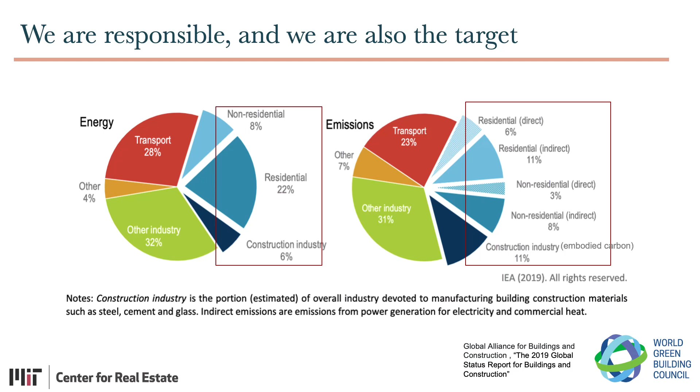Okay, when we look at this pie, they say, if I want my city to become net zero in 2040, we must target the building sector. So that's why all the real estate stakeholders are under big pressure to decarbonize. This is not just a US story, it's a global story. There are headlines in the media: the European Green Deal, a renovation wave, where they will invest a lot to renovate and decarbonize buildings. Mumbai, Asia, Mexico City, and in the US we have the Inflation Reduction Act, which injects a lot of capital into this sector to decarbonize it. So that's basically what's going on for decarbonization.

To decarbonize the building sector, we first need to understand what carbon is about for the building sector. We showed the building's carbon footprint, right? In general, two major categories. One is embodied carbon, in the concrete, in the cement, and in the production supply chain where you gather all the materials and then build. That's embodied carbon. The other category is operational carbon. The building is already there, a very durable asset, 50 years, 100 years, and each year you operate it, you have operational carbon.

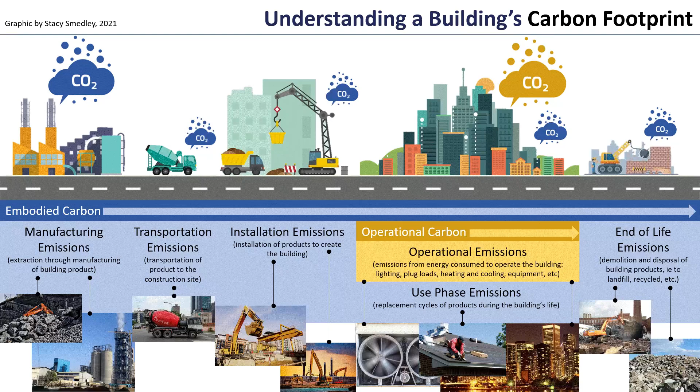So that's the idea. Now when they talk about decarbonization, many of those policies first look at operational carbon. They have not got the chance to look at embodied carbon, though now some of them try to look into this. But first, when they say decarbonize the buildings, they are talking about operational carbon. So that's basically the energy: the gas, the oil, and electricity you use in the building.

So now we also make our life easier. Let's put this embodied carbon aside, and we only think about the operational carbon. For operational carbon, there are several strategies that can help to decarbonize the buildings. Do you have any idea of these strategies of decarbonization? Look at operational carbon. Any thoughts, please?

Electrify the building? Electrify the building. Yeah, that's good. That's one of the major topics we are going to talk about. But first, think about the high level. What are the ways that we can decarbonize the building? Weatherization, is that it? Yes, that helps the building to have better insulation, for example, right? For the cold weather, yes.

Perhaps also using passive strategies. Passive strategies. What kind of passive strategies? Give an example. It's like a wind effect where you have like a wind, perhaps. Ventilation, yeah. Like this natural ventilation. You don't use a machine, but you use the natural wind, right? Okay, Wilson. Maybe use less gas or electricity. Yes, okay, good. So that's the first thing I want to talk about.

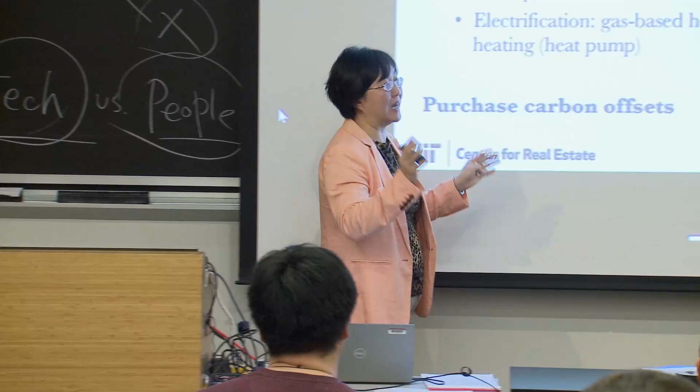And then another thing is you purchase a lot of energy from the city level grid, right? The electricity. So then you need to change from the fossil fuel, gas, into electricity for the major types of energy consumption, especially winter heating, from gas to electricity. And then if the city is also doing a good job, the city will decarbonize the city grids. If the city's electricity is from solar or renewable energy, then you switch to fully electrified, and you are decarbonizing your buildings.

If you only change to electricity, but the city's grid is still dirty and they use coal to generate electricity, then it still won't work. So that's a collaboration between a city and a building. I remember reading an article about that, and they said that even if the cities are not decarbonizing their grid, it's more efficient to use electricity, because the transportation footprint of coal and oil is a lot higher than that of electricity. It's very efficient to transport electricity.

Yeah, that makes sense. Because the city is big, the scale, economies of scale, right? They generate the electricity and then you get the electricity from them. It's better than every building buying some coal and burning the coal to generate electricity by themselves. But ultimately, they need to decarbonize the grid so that you can get net zero.

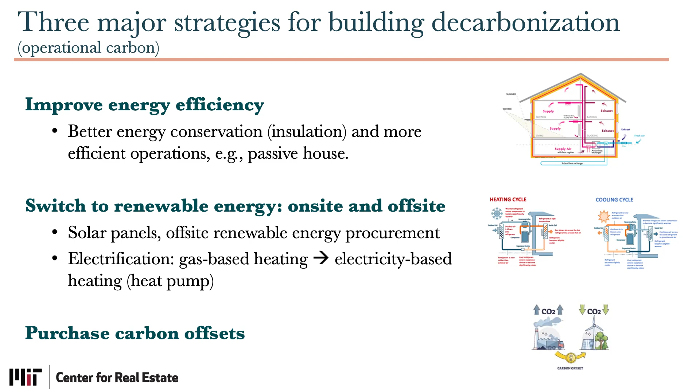I know the limitation about buying the carbon credit. Always the same, like the real case emission of the industry versus the same carbon offsets. But I know many developing countries sell very many carbon offsets, a lot, right?

Yeah. For example, this factory emits 100 tons of CO2 emission. And they pledge, they say, oh, we want to be a good citizen to the entire world. We want to reduce our carbon emission to 50 tons. But how can they reduce? Technologically, they cannot. They buy 50 tons of carbon offset from the forest.

Then they say, although we emit 100 tons, no change, still 100 tons, minus 50 tons from the forest, because the forest reduced 50 tons. And then overall they artificially say, oh, we achieved this. So that's the carbon offset idea.

But as you said, there are a lot of limitations, especially additionality. So with carbon offset, the challenge is additionality is a big thing, which means, of course, you need to verify.

You cannot just cheat. If the forest they didn't reduce, you cannot cheat. There's a verification that's very important. But besides verification, which is the minimum requirement, you cannot cheat.

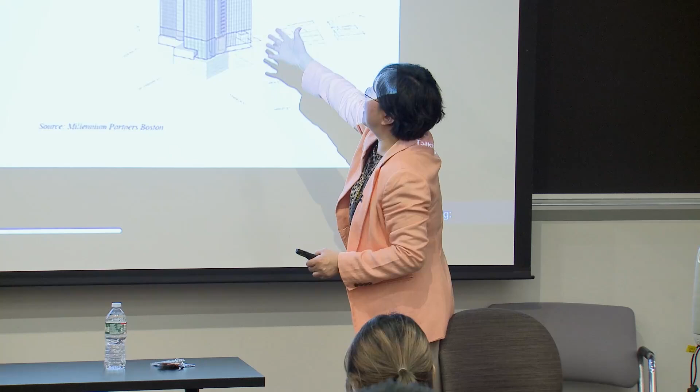So this is the Winthrop Center. It's in Boston downtown. There are many old buildings here and there as neighbors, and they are not very beautiful. This one is new and very beautiful, and it's so tall. It has two parts, almost half to half.

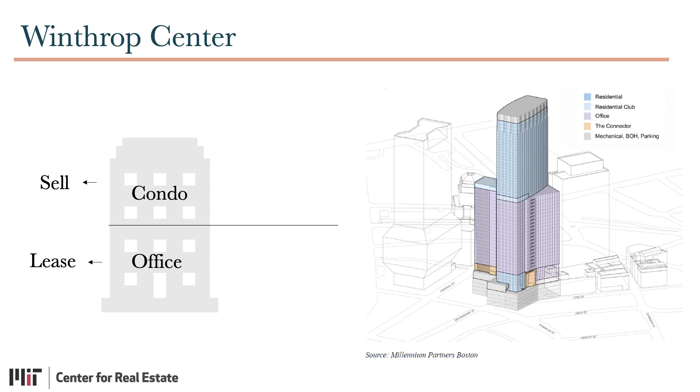The lower part is office, that's for lease. The upper part is condo, luxury condo, because that's their comparative advantage. They always build and sell luxury condos, and that's for sale. Think about this.

Now, they really committed to ESG and sustainability, but for the two parts, they still treated them differently in terms of degree—to what degree they want to achieve the highest sustainability and energy efficiency. One is very, very green. The other is okay green, but not so green. Guess which part is extreme green?

Why? Any rationale? Quick rationale—why is office extreme green?

The future tenants, that's what they're demanding. They can market it as the largest passive house office building and attract financial service firms or others who want a greener footprint. So this greenness or sustainability can be the selling point of the office part, and also because the tenants are more sophisticated, they demand it.

But for the condo, why not? Do the rich people not care? Well, at least operationally, if it's your condo, you can operate it however you want. You can leave the lights on all day, you can turn the AC to 72. Whereas in an office, there's more centralized control—maybe in the winter you go with a lower temperature.

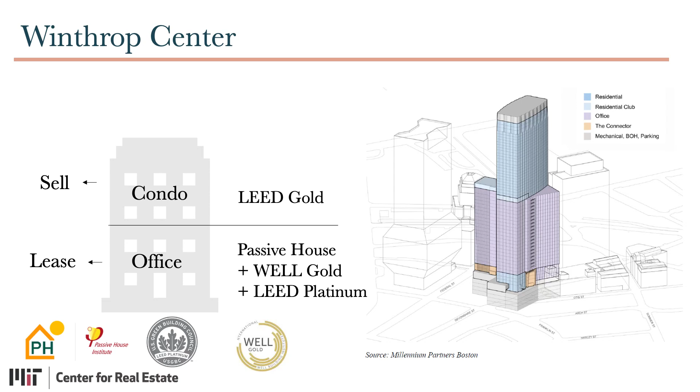As a side note, last session at the very end I quickly went through LEED. But today, tomorrow in recitation, Akrish will cover more technical details of LEED. Overall, LEED is a certificate for energy efficiency in green buildings, created by the US Green Building Council, USGBC. They have many systems—certified, silver, gold, and platinum, at least four levels—and many schemes: new buildings, existing buildings, commercial buildings, residential, core and shell like the outside frame, and school, retail, all kinds of types. So they have many subtopics and subsections of LEED, and Akrish will cover some details.

Another certificate is WELL. That looks at the healthy perspective—for example, water, air, internal factors like daylight, wellness, and comfort, etc. So they achieved this very high level.

So that's the certificate, and as we know, this really helped fix the information asymmetry problem we discussed. Without this, it was terrible—nobody could judge, and developers just self-advertised. Remember my China paper? At that time, China had nothing, and developers just said what they wanted to say—my building is great, my building is very energy efficient, you don't need to pay any energy bill. They just said so.

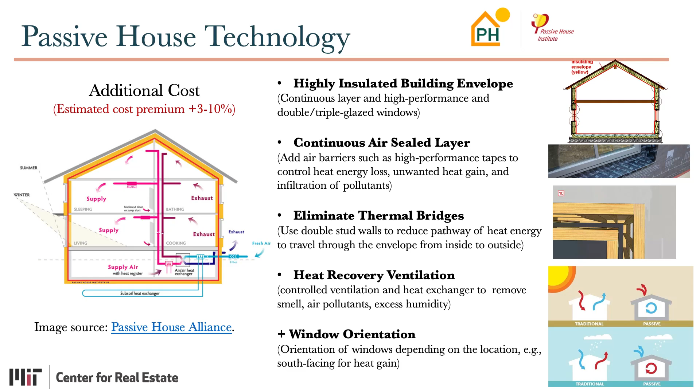Let me finish this point. Another thing is passive house. Really, really important thing is insulation. So they want very small windows. If the windows are too big, it's too hard. The cost will go up because you want a big window, and then you want a view, then you have a problem with insulation. So you need to invest a lot for the windows and the walls. So they want minimum windows. But minimum windows will be a disaster for luxury condos. You have a minimum window? No, not good. So they want big windows. But big windows means passive house is too hard to do.

You have a question? I was just going to ask, why is it either view or green, one or the other? But I think you just answered it. Also, on top of that, if you go back to the previous picture, with the windows, it's the way you take in light changes in the summer and in the winter, right? And if you're in the bottom part of the building, wouldn't that be affected because you have other buildings surrounding the property? Oh yes, if you're at the top, then you can fully do that. Right, at the top maybe the ventilation is easier to do. That's your point, ventilation. The light, it can hit you in the winter, it can hit you from that angle. Whereas if you're at the bottom, you can't take advantage of that.

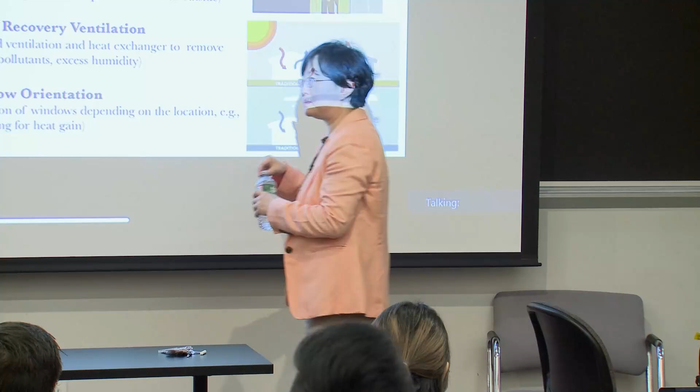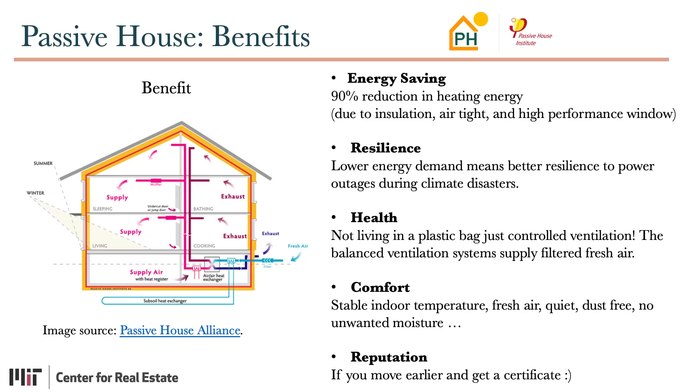So that's all this building technology and design perspective, to make sure they can invest reasonable money to do the passive house, but generate the most benefit from that. So they are not stupid, they are a developer, they are not an NGO, they are not like philosophy. They understand they need to calculate whether this makes business sense.

So they say, okay, upfront cost at first, 1.3 billion. And if we do passive house, if this lower part really goes extreme green, then plus 3 to 10% cost premium. And then we say, okay, reduce utility cost. They had a very rough estimate. And they said it would also increase rent and occupancy rate. We all discussed these parts last session, remember? The benefit: reduce the utility cost, you pay less, and all the tenants are so happy, they pay higher rent, and you can lease out very fast. So that's basically benefit and cost, they compare cost and benefit. They say, okay, this is a good deal, let's do it. But actually, at the time when they made the decision, they were uncertain.

They were uncertain at all, especially about the market. Who knows, right? How can you be so certain that if you build this, it will become so popular and all tenants will come? No. They were uncertain, so they said, no matter what, I don't care, I look at the long-term value because I hold this asset. Remember, this is a lease, so hold for many, many years. Maybe for some years it's not good, but I'm so patient, I can wait for another 10 years. They said so, I'm not sure whether they were thinking so, but they said so. They say, good, long-term view. And condo, they just sell. So basically, even if it doesn't increase, if this doesn't exist, I'm fine. I'm going to take the risk. I'm the first mover of the market.

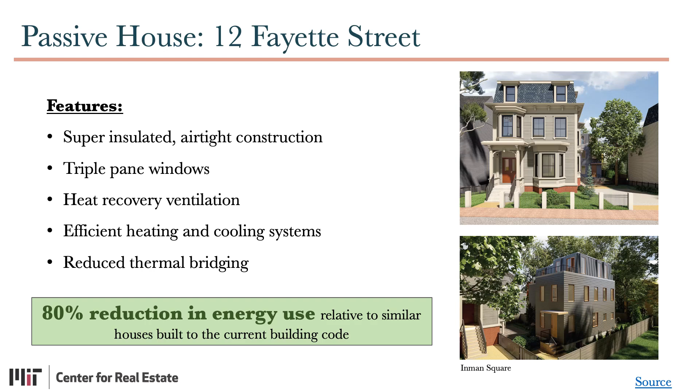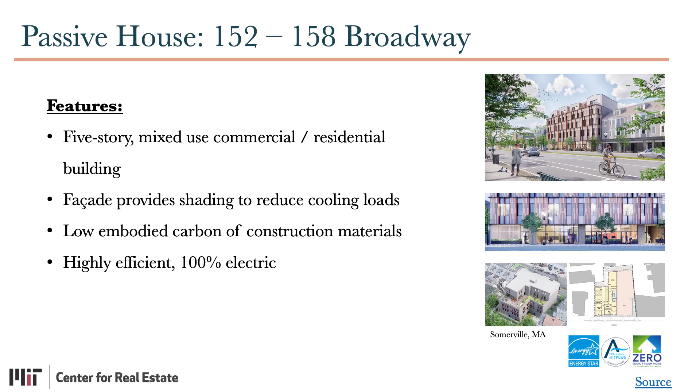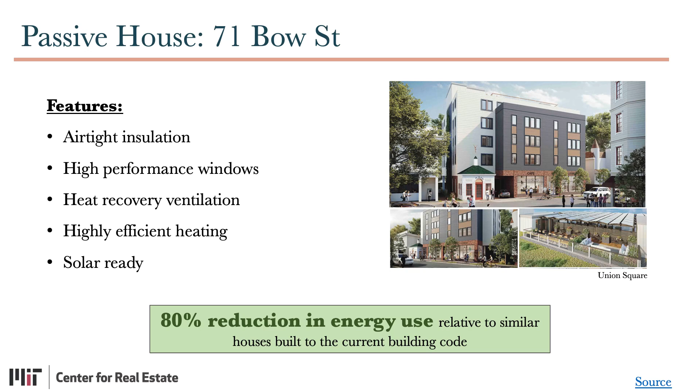And this one, this is Somerville — close by, if you have time, go there to take a look. This is Somerville passive house. Yeah, I think this is also multifamily. And this one is another one, Union Square — as you can see, it's also 80% reduction. This one was built by our MSRED alum.

Zhengzhen and I went there 2 years ago, maybe 1 year ago, and visited the project. At that time they had nothing, because they were still struggling with permits and community issues — they had all kinds of community meetings to get support to build. So we visited, and we know their very ambitious goal to be the largest passive house residential community in the U.S.

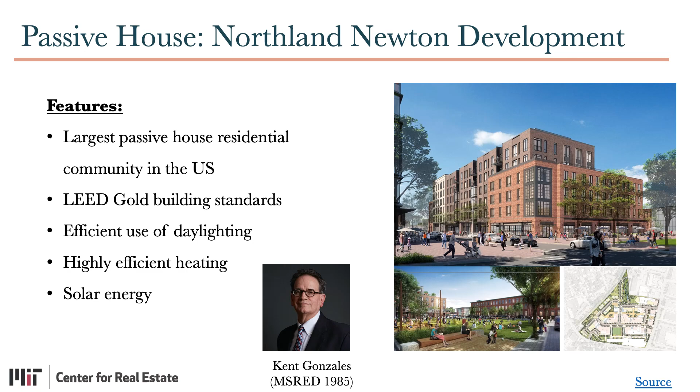That's also nearby, in Newton. So we have all this — you go to that website, you have all the passive house projects. Now let's move on to the second technology.

You have a question? Just one quick question on the passive house — is it possible to change existing buildings into passive houses? Because I think in a lot of countries, making the existing housing stock...

Yes, renovation. That's true. You can do that, but it will be more costly, because you need to change the original settings.

Now let's move on to the second technology. I feel embarrassed talking about technology, although I'm not a technology person, but I tried my best to explain it in a way we can understand. Now we are talking about electrification, meaning switch from gas to electricity.

That's very important, as now we assume we cannot control the city grid, but we assume the city grid will become greener and greener. If the city's grid is greener and greener, it's good to switch from gas to electricity. Think about this.

Cooling will already use electricity, right? These are ACs, but if this is very decentralized and old style ACs, not very efficient, that's true. This is old style, but it's already electricity, no problem.

Heating, especially in the New England area, still has a lot of gas-based or oil-based heating, no matter what. Now it's a very important trend to change from gas-based heating to electric heat pumps that can use electricity to do heating, and can also do cooling.

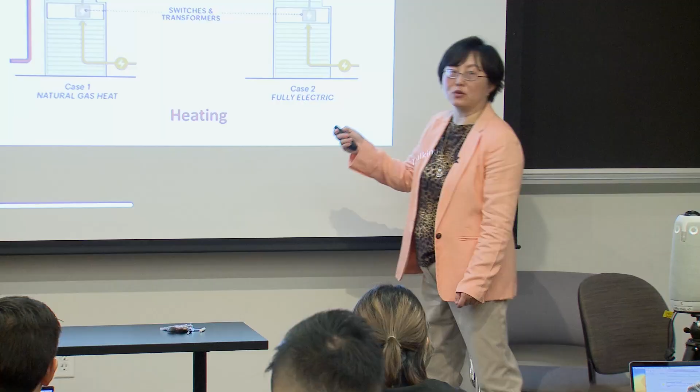I will show you. But the point is, the old style gas-based systems have natural gas water boilers, and you just boil the water, it becomes hot water, then you use the water to heat the building. So you have something like this.

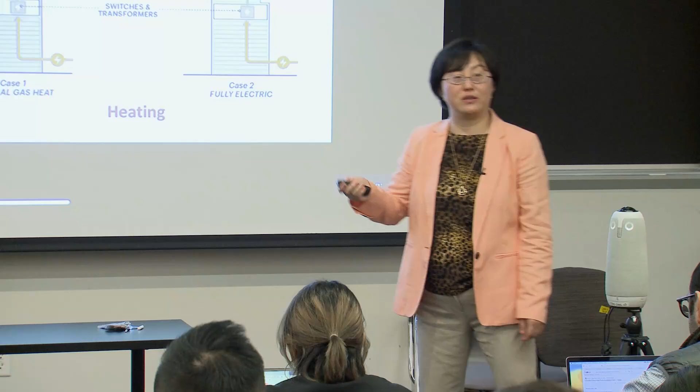But if you change to electricity, then you need to put in this technology, this machine called heat pumps - big heat pumps, especially the air source heat pumps. This is what we did last year, an office building in New York City, but you can also use this in residential houses. This is a high-rise office building, right?

So the point is electricity is so important. Heat pumps are more efficient, but you can see the heat pump machine will occupy a lot of space. That's a downside of electricity.

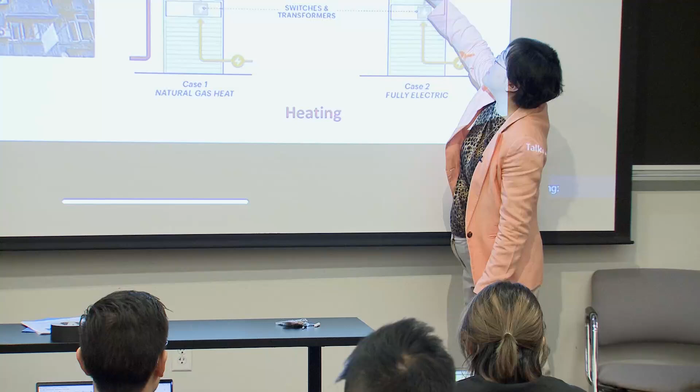Because then you have to sacrifice some leasable space. At first, you can lease this out and get rental revenue, but if you want to put all the machines here, then you lose leasable space, which will hurt your rental revenue. So that's the cost of this.

But the benefit, you have a lot of benefit. So that's this, and heat pump technology - Google it. I just want to say it can do the heating cycle and the cooling cycle. You will have the same thing.

Let me show you the picture here so I have a better understanding. So you have an outside unit, outside your door or outside your house, and inside you have this, very similar to an air conditioner, but it's a heat pump. You have this outside unit and inside unit, and you use electricity to heat your house.

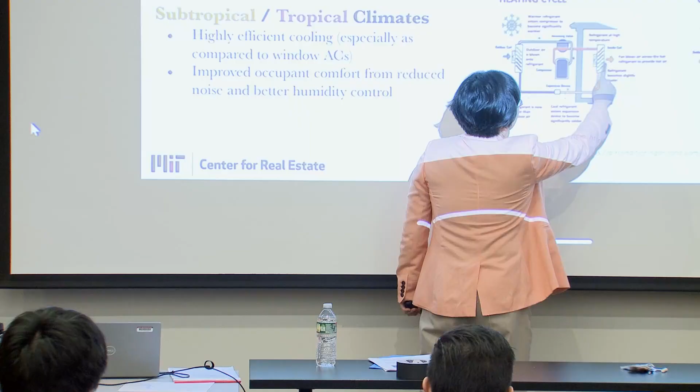When it's heating, you have this refrigerant, and it goes through this cycle - it can emit heat into the room and become cooler, and then get heat from outside through the compressor here and become hotter. Then it's a cycle.

And cooling is the reverse cycle - you get cooler, then emit cold air into the internal space, and become warmer, then go outside. So that's a cycle of this. Basically, you can use this anywhere, not just for heating, but also cooling.

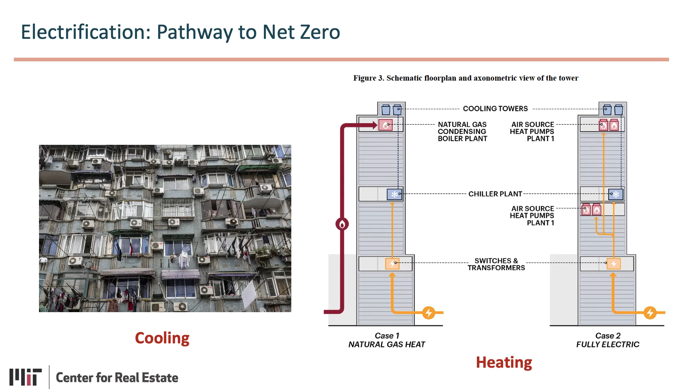The data shows for cooling, it has better efficiency than old-style, old-fashioned window ACs. That's why even in a very hot area, you can use it for AC, but in a cold area you can use it for both heating and cooling. So that's a heat pump.

So now they really promote heat pumps a lot because they really want to switch from gas boilers, the gas-based boilers, to heat pumps that are fully electrified, only electricity.

Then we have Mass Save - I'm not sure, for those who live here for some years, you know it. I think you knocked your head a lot on this. Did you apply to this? Yeah. You applied to Mass Save? Yeah, I got it for your house? For installing the heat pump. Good, okay, Mac, you have an example there.

If you decide to install a heat pump, you can get $10,000 from the state, right? So that incentivizes you - Mackenzie, to do this, right? But did your neighbors all do this, or only you, just me?

Just you. Why didn't your neighbors get this $10,000? Right, well, you know, it is a difficult process. You mean the application, bureaucratic? Yeah, and actually a big issue with triple deckers, older triple deckers, is they don't have the electrical capacity. We only have 100 amps coming into our whole building, which is crazy low.

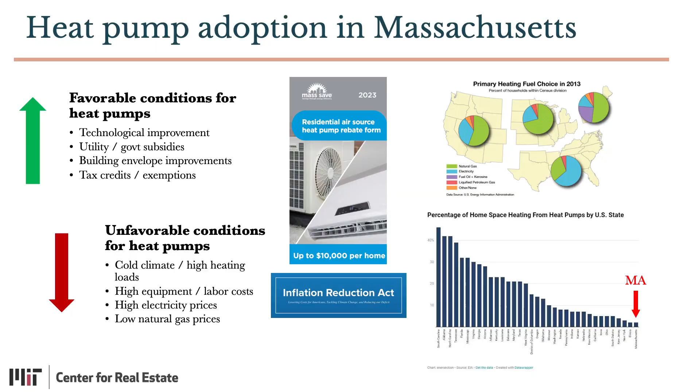And another thing, you can see MA lags so far behind all the states in adoption of heat pumps. MA is here. So that's because of us. We didn't do this. We need to learn to follow Mackenzie and do this, to push MA like this. Yes, so that's the point.

But we are now doing research. My lab is doing research to understand the reasons for the slow adoption of heat pumps. I'm working with Professor Chris Knittel, a Sloan professor in energy economics. We got a small grant from the MIT Energy Initiative, because they want to understand. Then we surveyed and got data from all the houses that chose to install heat pumps in their households. Then we got their cost.

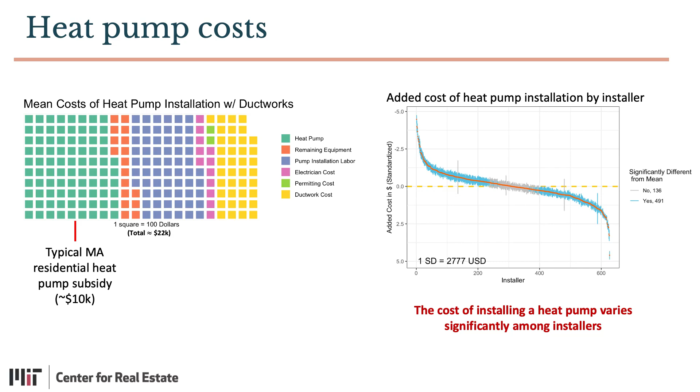See this cost. 1 square is $100. So altogether, the total cost will be 22K, but you can get 10K from the government. These green squares are the equipment, just the heat pump machine itself. But you cannot just buy a machine and put it in your house, right? You need to hire companies to install it, that's installers. And then you need labor, electrician, permitting and all kinds of things. So the MA subsidy of 10K covers about half, and you still need to pay the rest. It's not free. So that may be one reason.

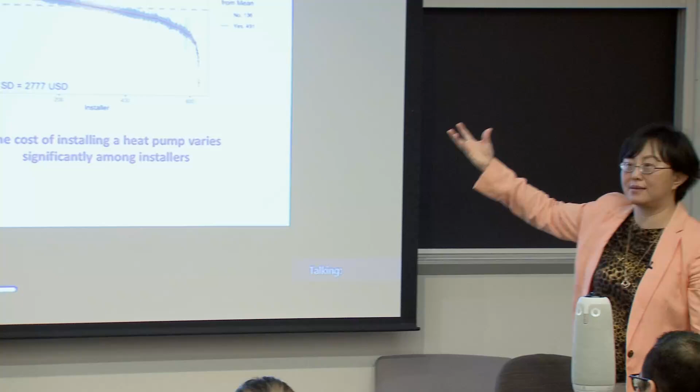You still need to go through all this, and also it's a lengthy permitting process. Not like you fill out a form, then tomorrow someone will come to install. No.

And we also had so many installers, and we found out that the installation fee varies so much across different installers. And we even found some bigger installers, they charge higher price to install. The smaller ones, they charge lower, but the bigger ones, they charge high. So this market is not mature. So that's one reason. We are still going on the project, and we will find more interesting things.

Okay, now this leads to this economics. We cannot just rely on technology. No. Even if the technology is perfect, the heat pump still has this low adoption problem, as I just showed. And think about this, then we go back to this conceptual level pro forma we always use as a tool to understand. Then think about the arrows. This is a baseline thing, right?

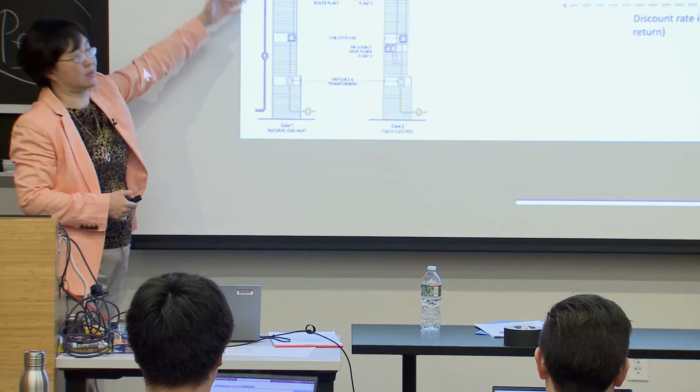Think about upfront cost. You need to invest money, 22K, to install. That's 22K for a house. For such a building it will be much higher cost. And then you get rent, and if you don't do it. Now, remember, I introduced a little bit about New York City's Local Law 97 in the intro session. It said, by 2035, if you are not net zero, or if your carbon emission is above the cap, you need to pay a penalty to the city, right?

That's why this is an office building in Manhattan that is under big pressure to go to heat pumps, because they know if they don't do that, later they will pay the city a penalty. Penalty becomes negative cash flow. So if you don't do this, you have this cash flow. And then you compare. If you do this, then which arrows will change and in which direction? Guess. Which arrows will change, right?

If you really decide. It's not a house, it's a high-rise office building like that. It's a downtown Manhattan building, and the designer of this building will come after midterm to teach 3 sustainable design sessions. The other Carlos will come. He designed the building, and the developer, I think that's Boston Properties, asked them what's the pros and cons of fully electrified and using heat pumps. Carlos had to answer that question. Then how does he answer from this economics perspective?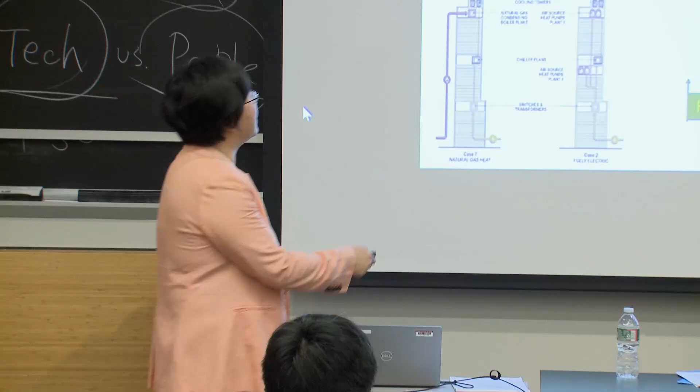So no penalty, good. Who knows about effective rent? Yes, maybe this becomes so popular and the tenants want to pay more and you get more tenants. But remember, you lose some space, right? You put all the machines there, then you lose the space to generate rental revenue. Operational cost, who knows? Whether electricity will become very expensive, don't know, right? So all these different scenarios. That's why this is not an easy question for an investor or developer to decide whether to go for electrification immediately. It's more complex, because of the future uncertainties.

That's another project in my lab. We are doing so many projects. If you are interested, come to me. These are all applied research projects, right? Just now I showed the Massachusetts heat pump installation puzzle. This is the electrification uncertainty. Natural gas prices, because of the Ukraine-Russia war, we don't know. Maybe gas will be more and more expensive. And another thing is the city grid decarbonization, because that's totally out of the developers' control. That's the city mayor's decision.

All the city mayors are very progressive, especially in this New York City case. We will decarbonize our grid by which year, for sure, all new renewables. But they don't have enough money to do so. They have a limited city budget, not enough to do this grid decarbonization. So the city's mayor said so, but it possibly will be a 10-year delay.

If the city just promised so but couldn't achieve that, even if your building becomes fully electrified, you still need to pay the penalty because the electricity is not clean. Then you will complain about the mayor, but the mayor is already gone, retired or stepped down, right? That's a problem, because the mayor cannot be in the position for 10 or 20 years. Although he pledged 2040 net zero, the mayor will be gone in 3 years. All this politics is so complicated. It's very hard to imagine.

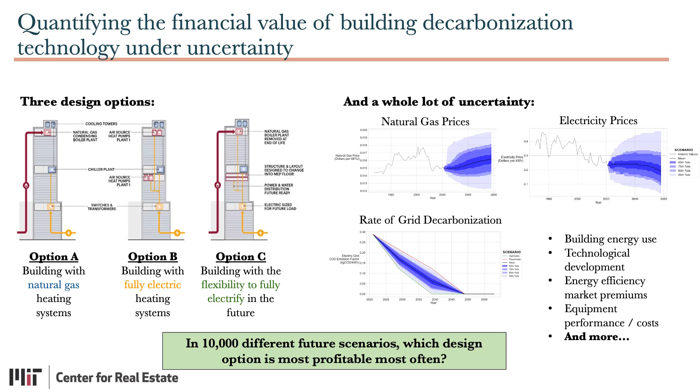We call it flexibility. So A, traditional. B, immediate electrification. C, invest in some flexibility and wait for the future, 5 years, 10 years, then make the decision. All the simulations show that the flexibility option C always wins in all kinds of cases. Of course, you can adjust the parameters of the future uncertainties.

The flexibility has an option value. You invest, later you figure out more, then you decide either yes or no, right? And you can wait a few more years. That's the option value, and that's why the flexibility option always wins. We wrote a paper on this. Okay, that's all about technology. Actually, when I talk about technology, it's not just the technology itself, but already some economics and financial analysis. But now I want to further emphasize the people side.

You have a question? Yeah, actually, before, when we built passive housing, we always lost a lot of money. The first challenge is the room rate, because in China, building passive housing will reduce the room rate by 8%. Oh, space. That's very similar to the heat pump occupying space. You are saying if you build a passive house, the wall will be thicker or the window will have multiple layers, so you lose some space. Yeah. Another is keeping winter warm. Many consumers are concerned about how to keep the winter warm and reduce energy loss.

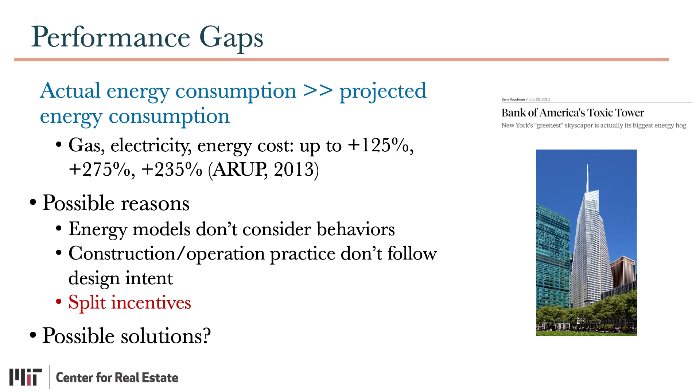But first of all, we need to understand the lease, the lease structure. There are so many types of leases. But overall, on this side, it's called full service gross lease, which means the tenants just pay a lump sum monthly rent, then don't need to worry about anything. All the energy bills, the landlord will pay, no problem. Just pay the lump sum, one number, then nothing to worry about.

On the other extreme, this is the spectrum. On the other end, called triple net lease, which means the tenants only pay the base rent, and for other things, all the tenants will pay -- the bills, the insurance, and all the things. So just a base rent, and then all other things, that's called net lease, net rent. This is gross. So that's a spectrum.

This is the spectrum, then in the middle is some combination of this and that. Who will pay what? That's a negotiation between the landlord and tenant, right? Negotiation -- you will pay this, you will pay that, and I will pay this. Then it's too complicated. Let's only look at the two ends of this spectrum. One is gross lease, you pay one amount, don't need to worry about other things. Or the triple net, which means you only pay a net lease, net rent, then you pay other bills, I mean the tenants.

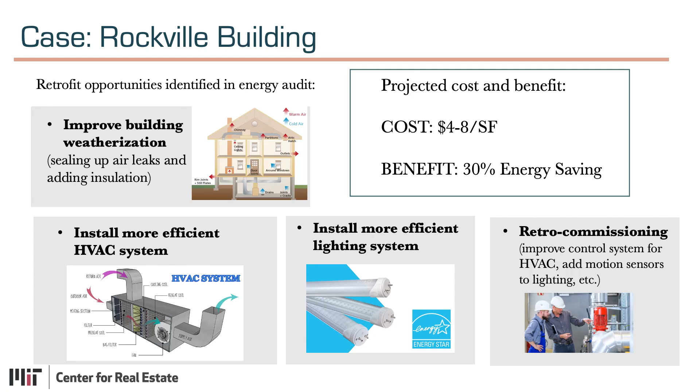Then he made some estimates. He has a team, they made some estimates. The case cost is $4 to $8 per square feet. If you use the median value, that will be $6 per square feet for the initial cost of this retrofit. And then the benefit is about 30% energy saving. That's very reasonable, right? Because you need to invest in weatherization, insulation, actually replace the old HVAC and lighting, and all kinds of things - cost, benefit. Then he said, okay, these are the parameters. These are all about technology.

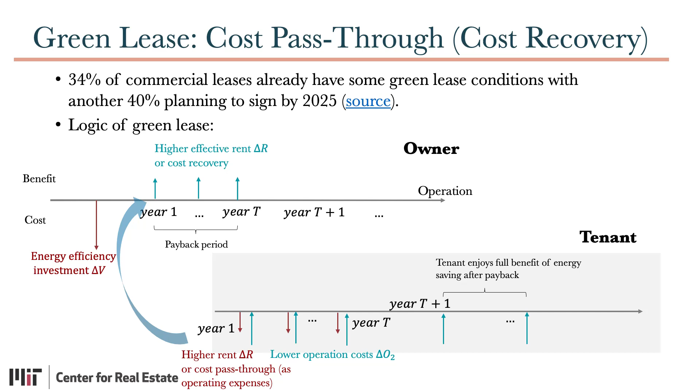It's not just about being generous — we define in the lease that if you have this energy saving, you share it with the owner, in terms of a higher effective rent, so that the benefit can be shared by the owner and the tenants, incentivizing the owners to do so.

In this Rockville case, if they share and have a rent increase of 2.7% as a way to recover the cost, then it will turn around, and the owner's NPV will become positive. Both are smiling, win-win. Of course, this is hypothetical — we say a 2.7% increase of the rent will turn this around and give a relatively good NPV.

All happy? Do this. Final question: have you seen a lot of examples of this type of renegotiation of a previous lease to get this share?

Good point. So I will upload this — there are small mini cases, not big like HBS long cases, but green lease mini case 1, 2, 3, and you'll find them on our Canvas.

They have different strategies to share the cost, but the point is, first you need to show the landlord cannot just cheat. They need to show they have these small, decentralized meters that really record and show the tenants their energy bill reduction. Then you share as a percentage.

In this one, they work with the energy company and use renewables, and told the tenants they must purchase energy from this company because they worked together to generate renewable energy for the building. That's already put in the lease. So that's several types of green lease, and with this I'm going to conclude today's class.